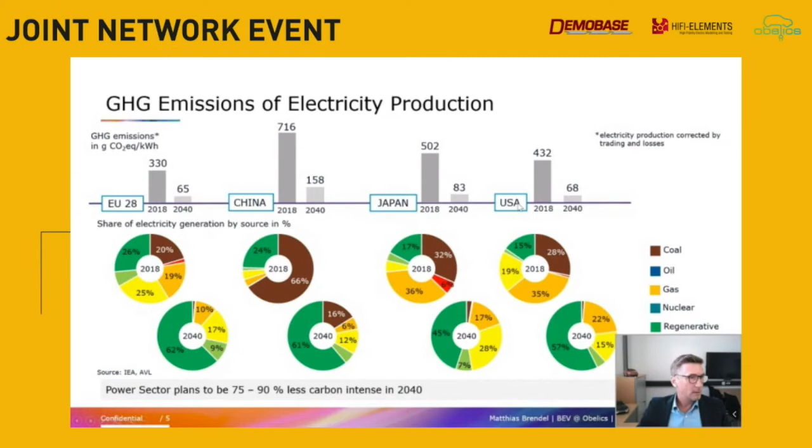And when you listen to the discussions in the energy sector, they also complain a lot about these high challenges and the speed that they need, and that the plans they have in place might not be sufficient to fulfill all these needs and requirements. Okay, what does it mean then for the vehicles and for reviewing the vehicles?

There you also need to differentiate when you have a good and sufficient source of renewable energy. There are different pathways. So for sure, it would be very likely that battery electric vehicles are directly charged by green energy, but you also need to see how do you store the energy in between, how do you transport the energy, where is the renewable energy actually coming from? So where is the source? Is it close by? Is it very remote? There's a lot of talk about maybe using North Africa for solar energy and somehow transmitting it to other regions.

But you also can see that there is a lot of discussion about e-fuels and power to gas or power to liquid, bigger plants that transform regenerative energy for combustion engines. So also other pathways, and I mentioned already fuel cells, and for sure with electrolyzers you can also transform the electrical energy into hydrogen and use the hydrogen directly for fuel cells, or maybe as an intermediate storage and transform it later on to maybe e-fuels, or maybe back again into battery electric.

So a lot of pathways to consider, all make sense, all have their applications, and I think it is always very important to stay open there, also in respect to the applications and also to the different technologies.

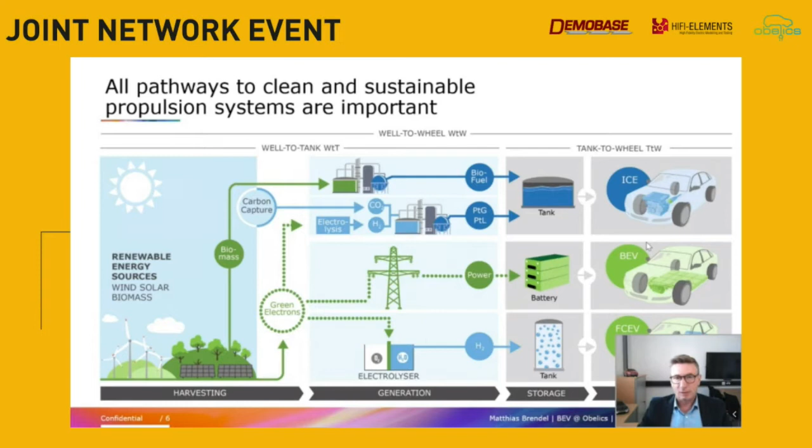So thinking about the carbon footprint, there are a lot of discussions about thinking about the entire process of a vehicle and its components. So where is the base material, the raw material, actually coming from? How much energy and what pathways do you have within manufacturing? Then the actual use of the car. So where is the energy for the daily use coming from? How does the infrastructure look?

And then also at the end of the life of a vehicle, how do you recycle? Can you do a lot of reuse of the recycling? Do you put maybe the battery, for instance, into a second life, into a second usage? So a very broad and very complex picture.

And when you think about it, I'm sure that you're also involved in those discussions, a lot of the industry is kind of unhappy and complaining about the current regulation, that tank to wheel is mostly addressed and it does not consider the full picture. So when you think about the CO2 footprint, it's just one slice of the entire chain. And so it's very, very difficult to go through all these sectors, also with regulations, to have a fair approach that in the end really helps the overriding goal with climate change and the Paris climate agreements.

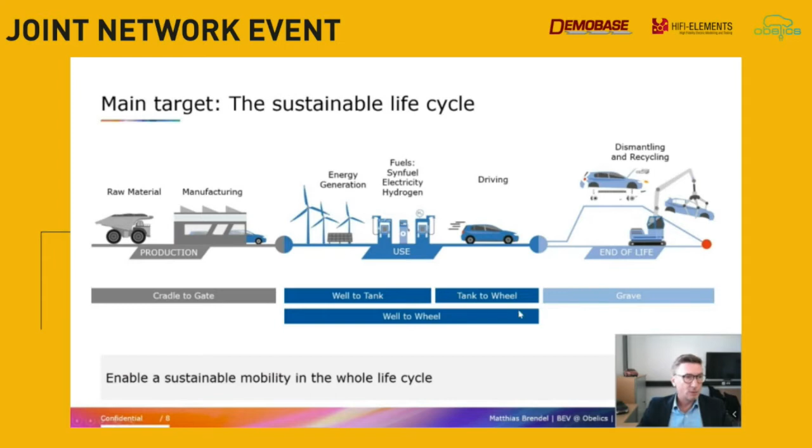So taking a look at the earlier steps in the process, in the production, how does that actually look in a comparison? You can see a conventional vehicle with 36 tons of CO2 compared to a hybrid electric vehicle, battery electric vehicle, or fuel cell electric vehicle. I think what is significant to monitor is the share of energy and CO2 emission that goes into the lifetime, the operation of the car, and what goes into the production. And you see that the share is changing from a combustion engine vehicle to a battery electric, or is also different for a fuel cell electric vehicle.

And as we are focusing today on battery, I'm taking out the battery part, where you can see that a lot of the CO2 emission comes in the production phase. I think you all read about those studies, that the vehicle is actually starting with a baggage of CO2 emission, and to get even with today's maybe mild hybrid, more or less clean combustion engine car, it takes quite a while until this evens out.

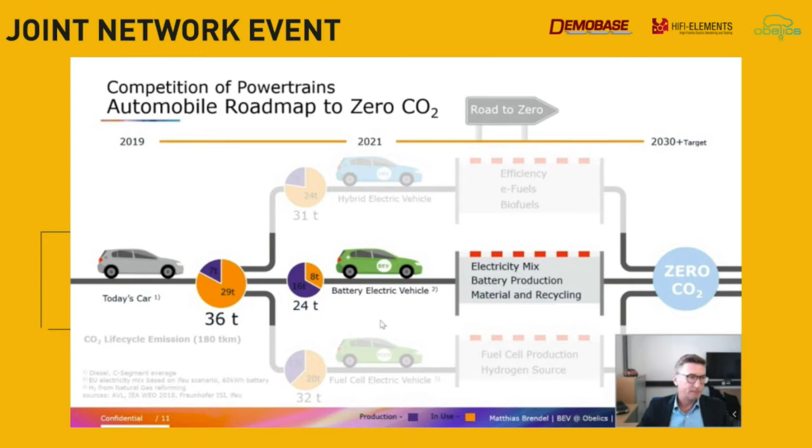And taking this into consideration and thinking, what can you do about this? What we did was take a look at the energy mix, what you can see here from the European Union. So you have basically today's standard with 137 kilograms CO2 per kilowatt hour battery capacity. The dark blue is the manufacturing part, the energy that you use there. And the light blue is the material, how you exploit the material, transport and everything. So you have two ways of influencing that.

On the one hand, you have the chance to improve your process, which moves the picture from the left to the right. So process improvements with electrode thickness optimization, less effort, less energy that you need for drying, maybe less solvent. So there's optimization that you can use there. But on the other hand, for sure, when you change your energy mix, which is also happening in parallel, you can move the picture from the upper portion to the lower portion.

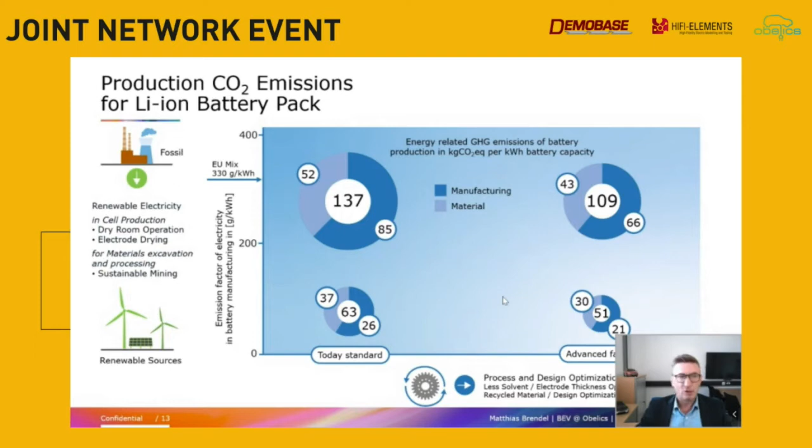So thinking about the end of life of the vehicle, so more into looking into the recycling. So what we did there was that we compared the three ways to make an assessment how meaningful it is that we recycle in the end a battery and a vehicle. So we looked into hydrometallurgy, pyrometallurgy, and direct recovery. And direct recovery, with a lot of material recovery, very efficient usage, but still in early stages, so still work to do so that this really becomes a viable process.

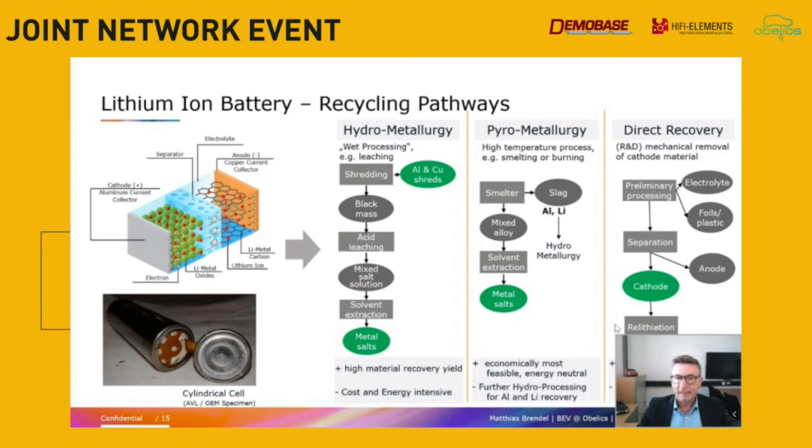Pyrometallurgy, also an economical use. You're not gaining all material out there, but you have a very economical way of doing that. And then the hydrometallurgy, where you have a lot of chemical processes behind there. You have a very high recovery rate of the materials, but it's very costly and energy intense. And when you compare that then in an overall picture, what would that actually mean?

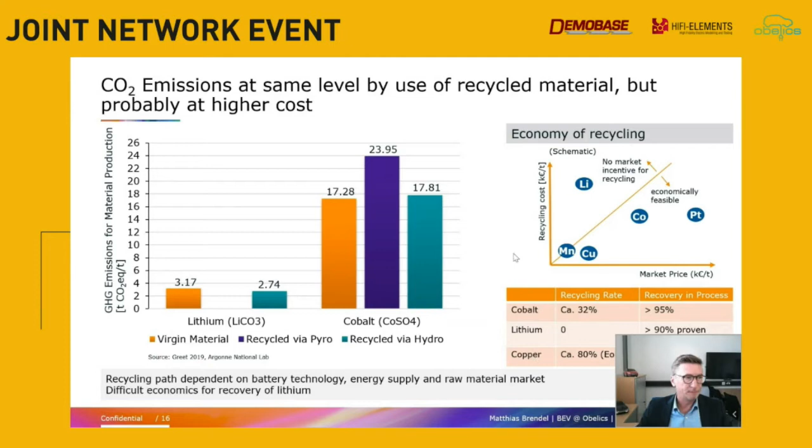So maybe to conclude that section here, there are a lot of questions when you think about the first life of the battery, the second life of the battery, and then the end of life of the battery that need to be addressed and answered. So also from the design, as I showed you, also from the process, it's influencing the operating strategy, the safety of the battery, is a reuse meaningful, when does it qualify for a reuse, how can you predict?

So a lot of things where I'm also sure that going into a better understanding, into modeling of the battery and making good assessments with state of health, is essential to make sure that there is good monitoring during lifetime, maybe a good specification in the beginning, and then also a good assessment of whether a second life or a recycling pathway would be the best step, the most efficient and economically the most meaningful next step then for the battery.

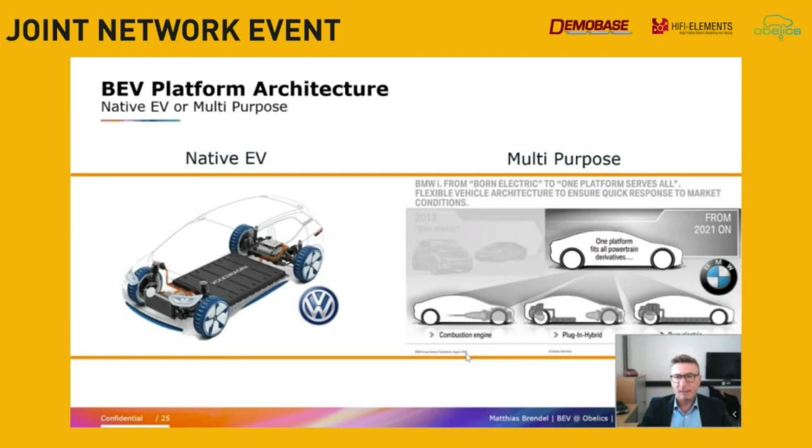And for instance BMW, even though they had a dedicated electric vehicle out there, they are deciding right now to go to a multi-purpose platform and see the most benefits for them in a combination like this. So you can see both trends. And I think it depends on what economy of scale you have in mind for the investment in a dedicated platform to make sense. From an optimization perspective, definitely the dedicated platform is something that has more potential.

Looking into the value chain, the whole industry is in a change and is working on their future plans. And you can see that, for instance, OEMs like VW, but also others, are looking very deeply into the value chain and how deep they do their vertical integration.

And for them, it's important that when things they had in their value chain before, like the combustion engine, might not have a long and sustainable future, this is replaced by something else. So this is the question that they all have to answer: What do I pull inside?

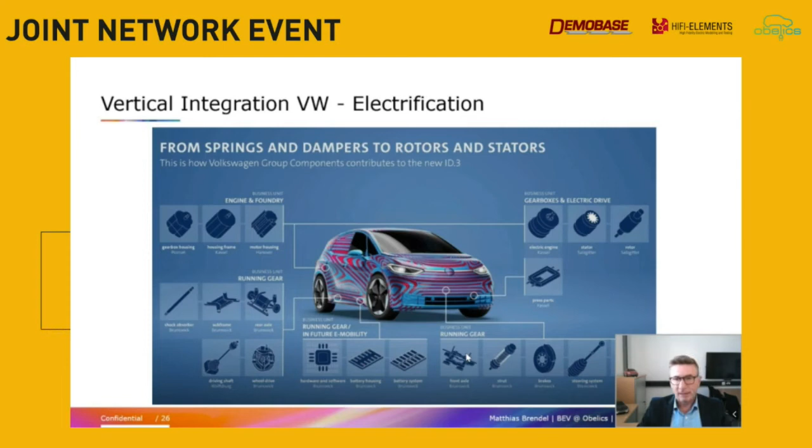Also, there is a lot of discussion about: do I need to do my own battery cell, or do I need to have my own capabilities to at least understand the battery cell very clearly, so that I can work meaningfully with the cell suppliers and also discuss with them on the right technical level? There is a lot going on right now at every OEM.

Also from the integration level. So on the left side, you see systems like 3-in-1 or 5-in-1, where you integrate more systems into the e-drive. E-drive then stands as a synonym for the e-machine, the transmission, and also the inverter. It could also include the DC-DC step-up converter, or can also integrate the onboard charger.

So a lot of integration work is going on, and there you always need to find the balance, if economy of scale for the components already justifies an integrated solution, because that probably does not fit into a lot of applications, since they need to be customized again. But that really depends on your models.

You see e-axles, also together with chassis components, like here in the middle picture. There the supply base is trying to merge their capabilities together, very high integration level, very much customized, but also a big part of the value chain. And then on the right picture, that's again the VW sketch.

But the trend that you see here is actually that the OEMs are also trying to partner or to bring their components or systems to the market, to make sure that they have economy of scale, and maybe also share the development costs to some extent with other partnerships. So there are a couple of areas where you can see competition for the tier one, but on the other hand, probably also a way of ensuring that the technology is getting bigger volumes and bigger scale.

So looking into the technology trend of the e-axle, here I brought one example, a solution with a high integration level. You see 2 electric motors, an integrated inverter, and an integrated transmission, and you're always shooting for very high efficiency, so that your thermal efficiency goes up, you minimize the cooling effort, the power density is improved, and you save weight and also space.

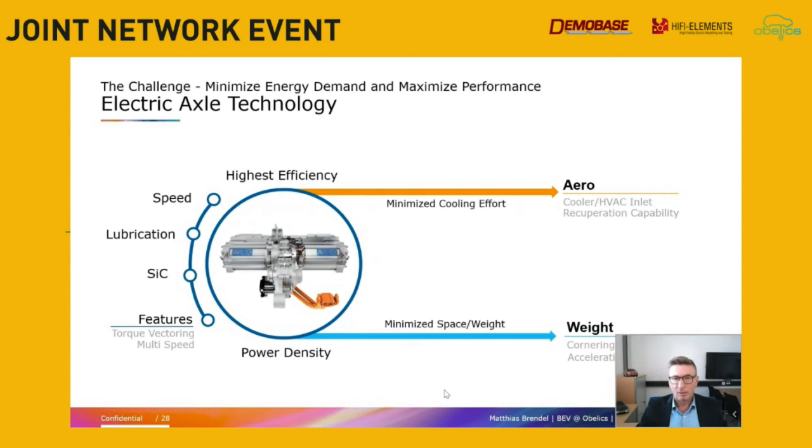There are a lot of trends going to higher speed, to higher RPMs of the e-machines, like 30,000 RPM. That also brings challenges and requirements for very good lubrication, sealing, and NVH. There's a big trend for the next generation of semiconductors, and also features like a dual e-machine concept with torque vectoring, and in the transmission there is also the debate of single or multi-speed designs.

Putting that on the timeline, on the upper side you see the power electronics, something a lot in the automotive industry is struggling with, because it has not much connection to technology they did before. But a lot is going on in power electronics: next generation semiconductors, maybe different housings, going from metal to plastic housing to save weight and volume. Silicon carbide will help to get efficiency and gain volume and power density.

Right now I think we are in the ballpark of 3 to 4 euro per kilowatt with the power electronics, and the goal is really to cut that in half in the next couple of years. And down there, looking at the e-drive systems, as I said earlier, going up to the high speed solution, highly integrated, very compact designs, and also the balance between 1-speed or 2-speed designs, depending on the requirements on the vehicle level.

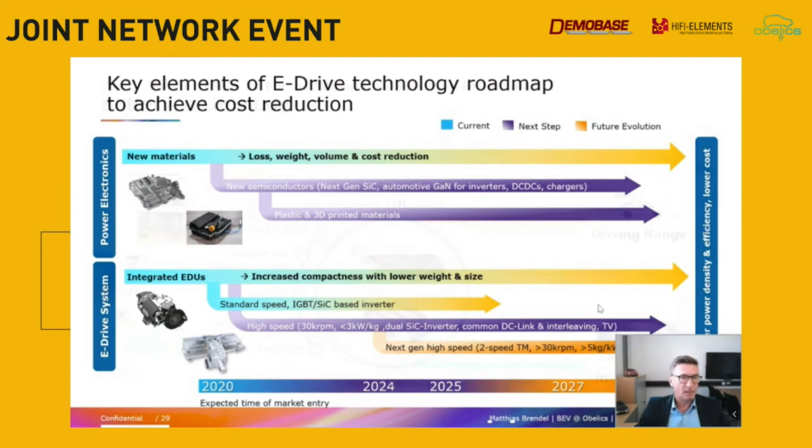Okay, taking a look at the battery. Efficiency is key, energy density is key. So it's also very important that you save space.

Looking into the next generation of cell chemistry, there's a lot to do around solid-state technology that has a lot of potential in energy density, also to some extent in cost, but there are also quite some challenges out there still in manufacturing concepts, and also different designs in the modularity. So there's still work to do until this really comes significantly into play. So our estimation is more the second half of the decade.

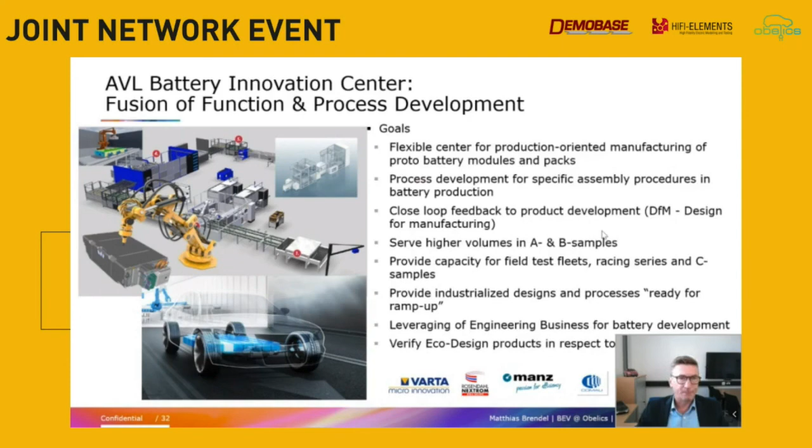Okay, looking into a couple of elements that I was talking about, all these are influencing somehow the battery trends, also the system trends. And what I wanted to say with this slide, actually, a lot of it is done with partnerships, with research partners, or in bigger initiatives like the one that you did work on together there. So we really appreciate these cooperations. I'm also part of the Battery Europe initiative that's going on currently, also with the European Commission. I'm part of the governance board there. So I think it is very important that this community here stays closely together to find the best synergies and work very closely together.

And to conclude my presentation, I just want to make sure that we see all these potentials and that we see that in a big context. I think we all have a lot of passion in that area and need to make sure that all these areas are moving ahead, and we have the viewpoint of connecting a lot of things together. There's potential and challenges in all these areas, but I think we also have great progress, and the future will be electric. So I think we see that very similarly.